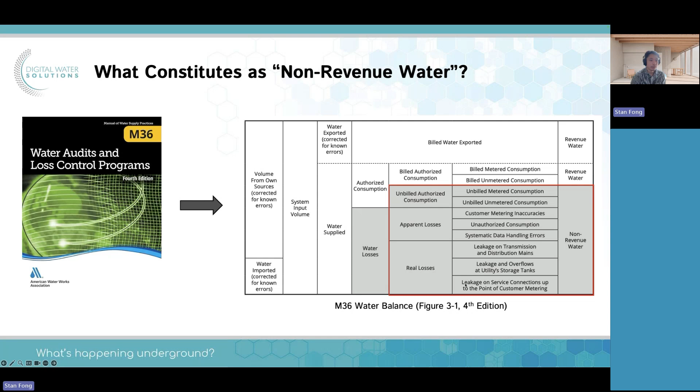So what is non-revenue water, right? Many of us are going to be familiar with AWWA and M36. This is kind of one of the standards that a lot of us look for when it comes to defining non-revenue water, water audits and water balances and whatnot. So this is the water balance according to M36, right? And we can see inside this water balance, when we talk about water loss, we really are looking at this portion here. So non-revenue water, according to M36, is made up of unbilled authorized consumption, apparent losses, and real losses, right?

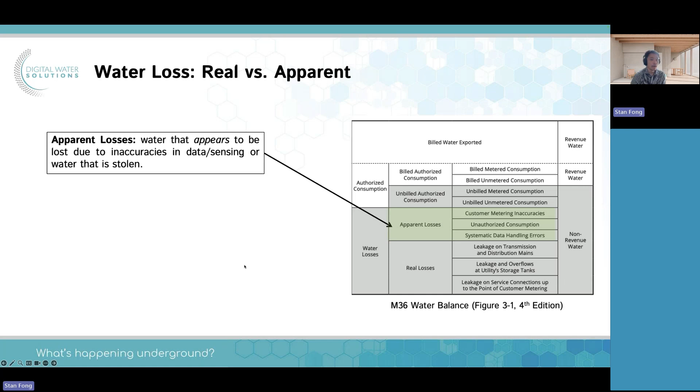So with that, the water loss is just the apparent loss and the real loss. And what's important to note here, when we talk about apparent losses, we're talking about water that more or less appears to be lost, right? Due to inaccuracies, your meters or your sensors have drifted over time, or water that has been taken out of the system without authorization. Real losses are leaks, right? Water that's lost to any kind of leakage, and there's different kinds of leaks. But the more important thing to note here is that in the US, real loss accounts for 87% of all water loss, right?

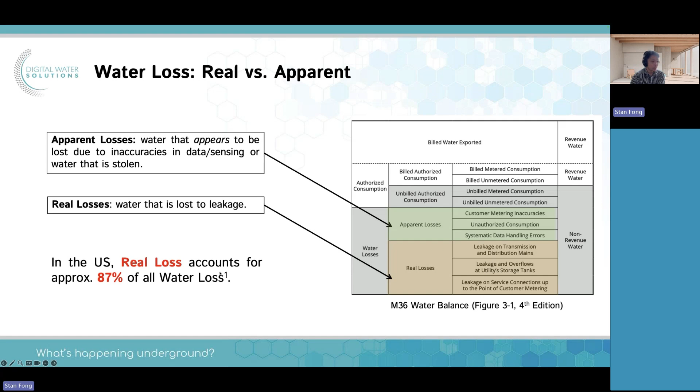So what types of real loss are there, right? So we talked about it's all leakage. And M36 goes on to define that real loss is one of 3 types. You've got reported leaks, which are breaks, right? They get called in. You get unreported leaks. So these are going to be the non-surfacing leaks that I think a lot of utilities are struggling with right now. They don't surface, so it's hard to detect them without a dedicated means like acoustic surveys, loggers, continuous monitoring. And then you have things like background leakage, which is basically defined as leaks that are too small to be detectable using these acoustic means and whatnot, right?

So the definitions of these, they're not absolute. And over time, as technology gets better, you're going to see more things that would have been classified as background leakage become unreported leaks because we're going to have technology that can detect these leaks earlier and earlier. And that's really the point of continuous monitoring, right?

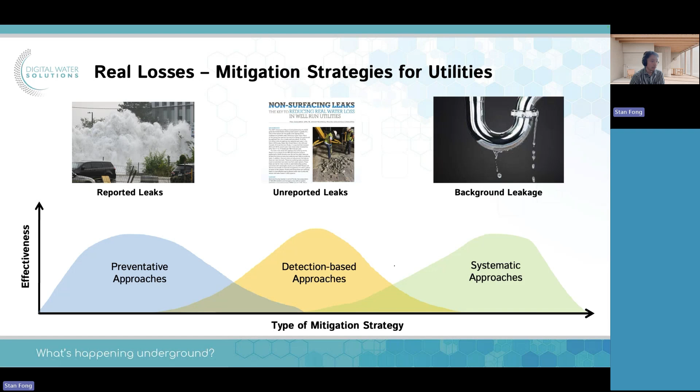There's really three separate schools of thought when it comes to how do I deal with these things, which means as a utility, most utilities deal with all three types. So you're going to need some strategy that incorporates elements of all three. And that's really where we'll talk about continuous monitoring.

But when it comes to any kind of leak, also from M36, we break the runtime of that leak into three stages. The awareness stage, the A. The L stage, location - how long does it take for you to pinpoint the leak? And then the R stage - how long does it actually take for you to repair the leak?

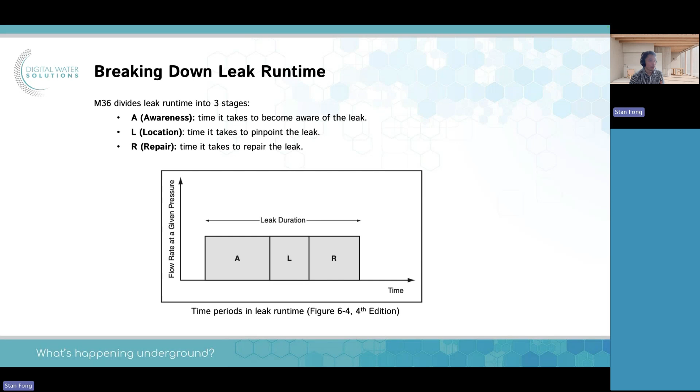So going back to the three types of leaks, just using an example for illustration - when you have a reported leak, the entire ALR stage is very, very short. You've got a leak that appears, someone calls it in, you know exactly where it is. You have to go and repair it because the flow rate is going to be very high, typically for those leaks. Unreported leaks, you're going to have a longer awareness stage. You're really not going to know about it until you go out and actually do that survey, or maybe it becomes a surfacing leak or a reported leak.

And then location can also be tricky at times, because these leaks are inherently subsurface and difficult to hear, depending on the system. And then background leakage - these leaks run for very, very prolonged periods of time. I'll show an example later where we think we see a background leak that turns into an unreported leak that turns into a reported leak. So sometimes these three types of leaks are interrelated - one becomes the next and so on.

But the idea is this awareness time is something we want to keep in mind. And when we think about how much water is lost to each type of leak, this is the flow rate on the y-axis, time on the x-axis. So the total amount of water lost is really just the area right under this curve.

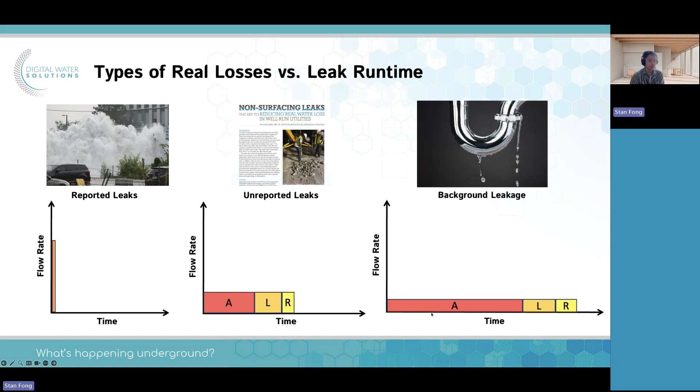So looking at the size of the shapes, you can see usually for these reported leaks, these breaks, although they have very high flow rates, comparing it to the runtime of unreported leaks and background leakage, you lose a lot more water on average to these two types of leaks, especially unreported leaks. So this is kind of the main takeaway here - a significant portion of water loss is going to occur during this awareness phase.

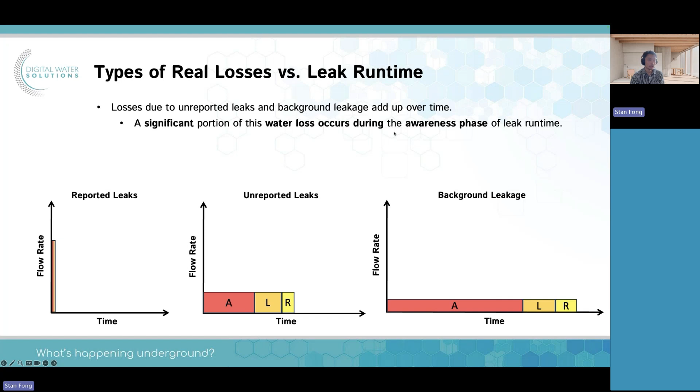And so this is where continuous monitoring comes in. The way that I look at continuous monitoring is it really is trying to mostly tackle this unreported leak problem - that's at least what we see in industry right now. A lot of these technologies are centered around leak detection, some are centered around pressure monitoring. But the idea is a continuous monitoring strategy is going to give you a little bit of leverage into all three of these categories. So taking our hydrant.AI solution, for example, what do we do?

So for acoustic leak detection, it's perennial for us. We have the acoustic sensors, the hydrophones, in the device. We're listening for leaks every day. You compare that to a leak survey where you only get a snapshot every time you send that surveyor out - it could be once a year, once every 4 years if you're rotating around your water system. So that's one of the benefits - having that perennial acoustic leak detection reduces that awareness stage. You know about that leak sooner, you can cut down on the water lost during that time.

We do, specifically with hydrant.AI, a lot with pressure anomaly detection. So we take that pressure data from the sensors. Each utility is different, each water system is different, and it learns the patterns and is able to identify when you have significant patterns or deviations from your normal pressure patterns. Hopefully that means you become aware of that before it becomes a larger problem down the road, or a break.

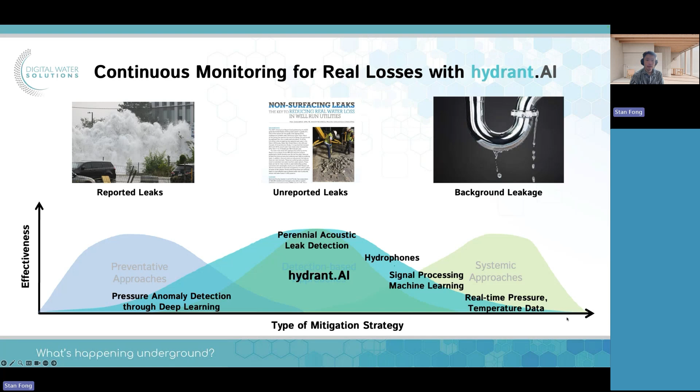Continuous monitoring, that's great on paper. How do we actually estimate the ROI of continuous monitoring? There's a couple big factors that come into play. One is geographic factors - where are you located, how expensive is water, how available is it, what's your method of water treatment? It's going to affect how much it costs to supply, as well as to the customer.

Another important factor is population density - how many metered connections do you have per mile of pipe? When you think about putting a continuous monitoring system, a permanent monitoring system in, it's got eyes on a certain length of pipe radiating outward from where you install that device. The more connections you have within that radius, the more bang for buck you get.

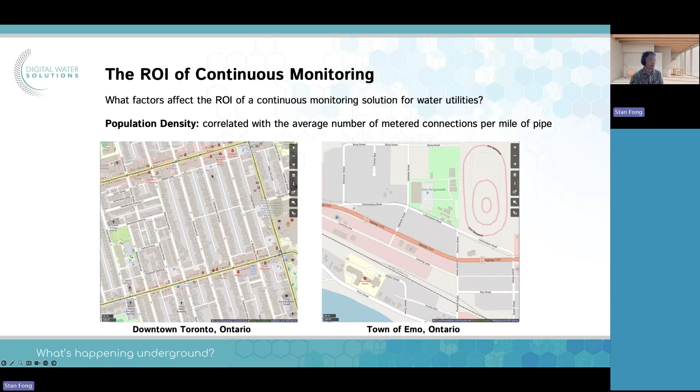This is showing an example of downtown Toronto. This is not the distribution network, but you can infer how many connections and how much pipe you have. These are on the same scale. This is another town in Ontario, Emo, and you can see the difference. If you're a water system out here, your approach to evaluating continuous monitoring, your strategy to deploying it, is going to be very different compared to someone like Toronto.

Another factor is pipe material and age. Average break rate is going to vary significantly depending on the type of pipe material. Older pipe is more likely to fail, but from a report by Utah Water Research Facility in 2023, you can see cast iron has 3 times the failure rate of AC, while PVC has a very low failure rate. The type of pipe material you have is going to significantly impact your potential ROI as well.

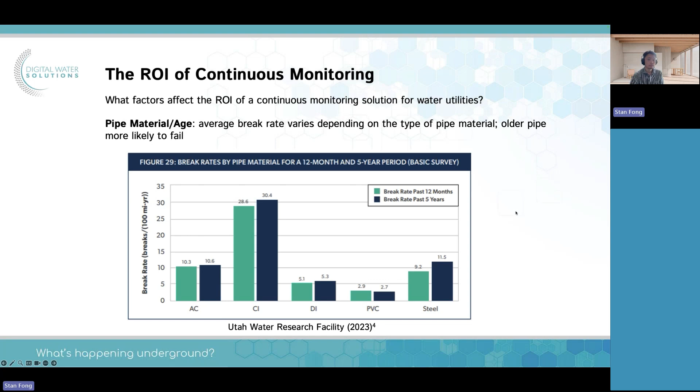So what does that really mean? It translates to a lot of complexity when it comes to figuring out what you're actually going to get back when you invest in a continuous monitoring system. With that in mind, internally at DWS, we wanted to develop an ROI calculator for utilities - maybe your utility is looking into continuous monitoring and you want to understand what you'll get back potentially from the system, or you're a utility that already has hydrant.AI and you want to be able to quantify the ROI of leaks that you find in the system.

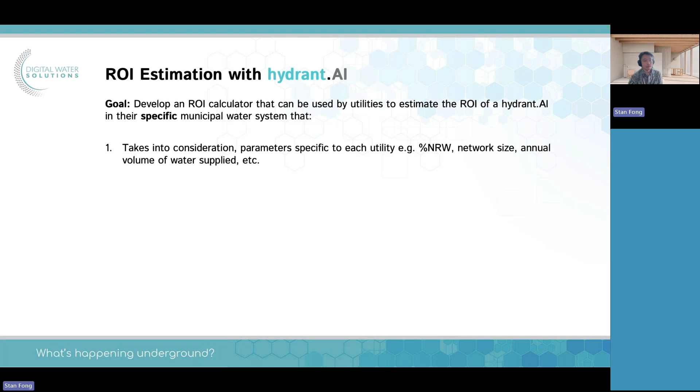Some of the goals we had - we want this calculator to take into account the parameters that are specific to each utility: what is your percent non-revenue water, the size of your network, total length of your water mains, annual volume of water supplied, those geographic factors, population density, pipe material. And this is important - wherever possible, use data from publicly available sources, things like average break rate, water costs. Anytime we can use publicly available data and cite that data in the calculator, it helps build confidence and transparency in the calculator.

To add on to that, since this is an ROI calculator for our specific continuous monitoring solution, there are going to be parameters in there that will not be publicly available. The important thing for us is to calibrate these parameters using real world performance - you'll see in the case studies whether the numbers we're generating from that calculator are in line with what we've actually seen from these deployments.

So this calculator is going to be available on our site for anybody to use, hopefully in the next month or two. But I won't make that promise on behalf of the developers. And there's also going to be a white paper that goes into all this information in more detail.

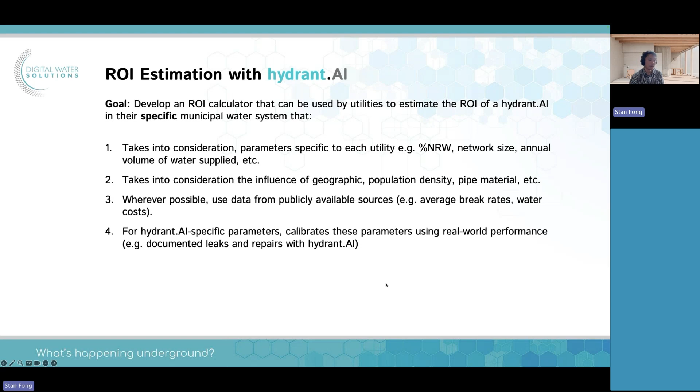Don't worry too much about taking in everything here. Just to show some examples, this is a plot that's generated showing cumulative water savings. This particular iteration looks at differences between geography. I've picked a fictitious utility, DWS Waterworks, with some average unit water cost to the consumer, and you can see how that compares to the national average across the US.

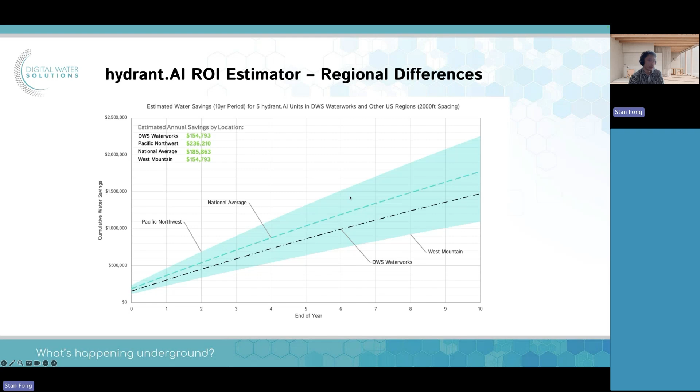If you're somewhere in the Pacific Northwest, you're in this upper bound of savings. And if you're in the West Mountain region, you're in this range. This is generated from a device spacing we have for our units—I'll get into that in a few slides. So this is just to show there's sometimes a large disparity depending on where you're located and the type of ROI you can get from continuous monitoring.

Another version of this calculator lets you look at population density. Similar to that last plot, if you're high population density, you're going to be on the upper end of this curve—you're going to have a higher expected return on your investment, as opposed to low population density, where you're going to see less, with everything else held constant.

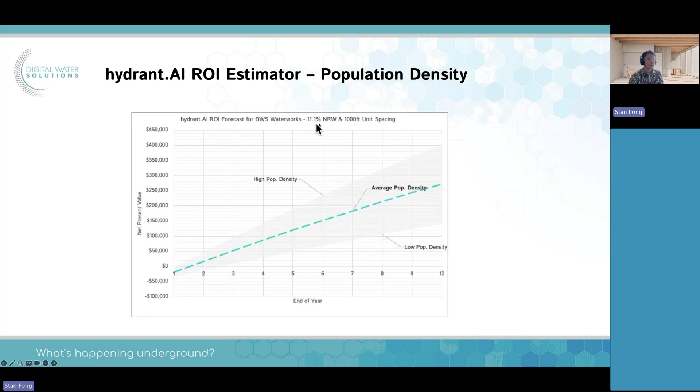For example, when you put the units farther apart, you're getting more visibility on pressure in a larger portion of your system. Spacing the units close together is good for leak detection, but you're going to lose out on pressure monitoring. So there are some benefits not incorporated into this calculation—this is just an example, and we'll have a paper that explains this in more detail.

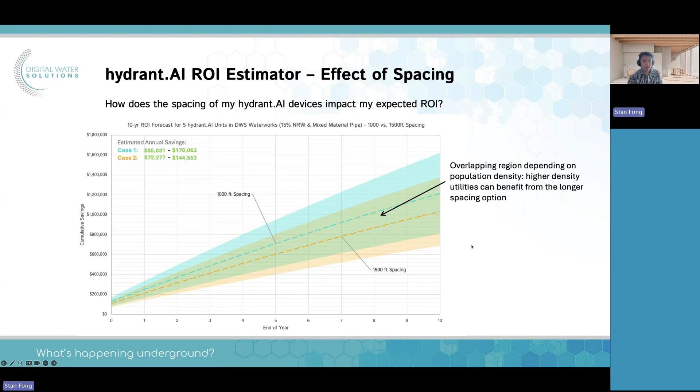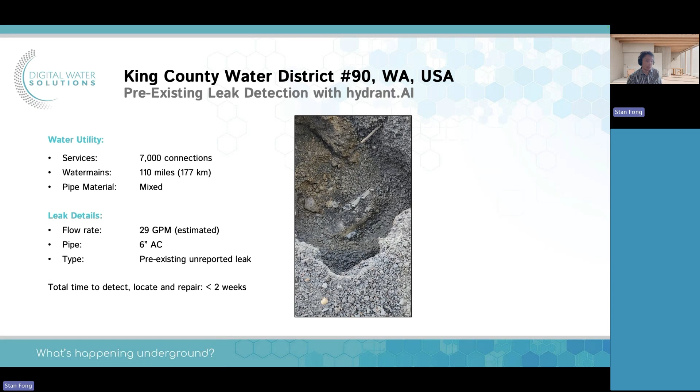I want to jump into some of the case studies. How do we actually show that continuous monitoring works in terms of ROI? One that we did recently was with King County. There's a pre-existing leak that's been in the system—we don't know for how long. We install our units and we're able to detect that leak right away. That's one of the things we can do with our hydrant.AI platform.

And then we can repair that leak—that's the leak there being repaired. This is for King County, WD-90 in Washington, US. They've got 7,000 service connections, 110 miles of water main, mixed material. This particular area where we deployed was AC, with a fairly large leak—29 gallons per minute, high pressures in this particular zone.

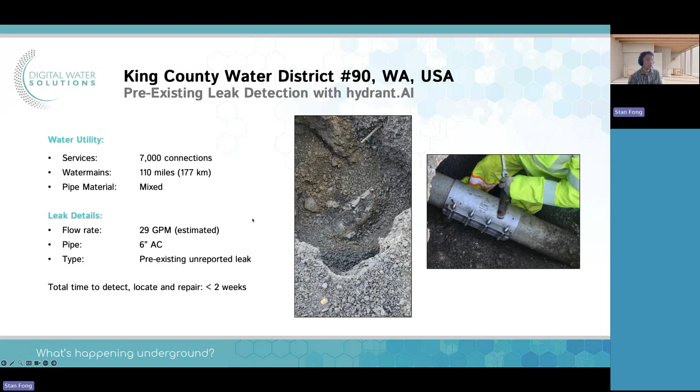And this is a pre-existing, unreported leak. The actual time to detect, locate, and repair, once the units were installed, is roughly less than 2 weeks. But if I look at that in terms of the implications for the next leak of this nature—because it's a pre-existing leak, we don't know how long it was running prior to the start of monitoring—it could have been going for months, or just a few days.

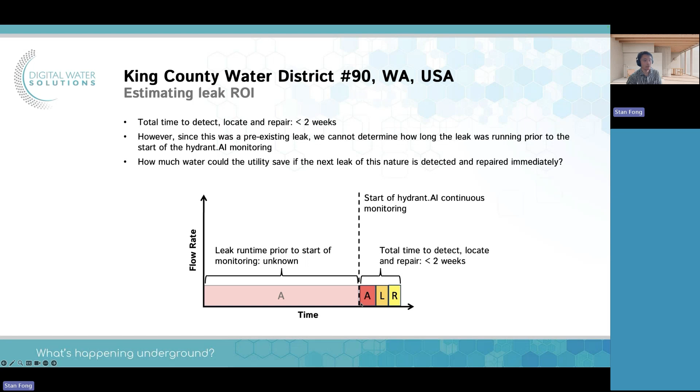But the idea is, with continuous monitoring in place, the next leak you see of this nature, you'll be able to follow this timeline—detecting, locating, and repairing it in 2 weeks, as opposed to having it run for months or years.

So we found in this case, that leak would have cost the utility $6,700 a month in lost water revenue. If you let that leak run for one year, that's $80,000. When you have continuous monitoring in place, that leak is only going to cost you $3,000. You're going to find and repair that very quickly.

So the idea here is to be able to demonstrate with any solution, any technology that you implement, that you can get your ROI back in some tangible way, in some reasonable period of time. With us, we're trying to show the value of continuous monitoring. Yes, it's a permanent long-term solution, but the ROI actually comes very quickly. You're going to get a lot of that value back in the first year.

And then you're going to continue to see value, because what we see in a lot of these areas with high water losses is you fix one leak, another one is going to happen. It's not that you fix all the leaks there and that's great, you can move the unit somewhere else. You're always going to get leakage. It's always going to be this continuous cycle, this battle with aging pipe and whatnot. So you're going to see that value return year over year, most likely.

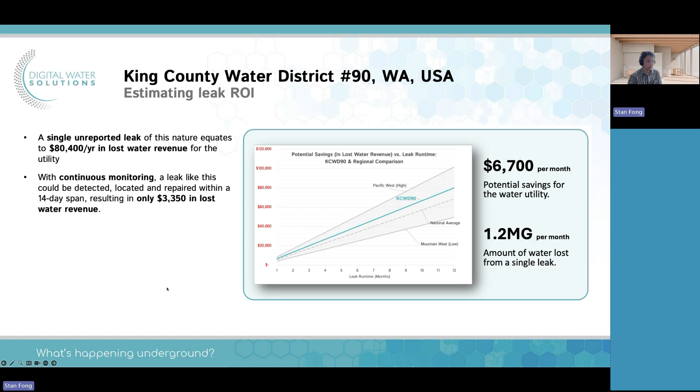So another example here is close to us, in the region of Waterloo, specifically the township of Ayr. Very, very small distribution network. You can see just 15 miles of services and 20 miles of water main. Mixed material, but mostly PVC. This is a very small leak that we found here, and this is a few years ago that this particular case study was put together.

This was really during the phase where we're trying to understand what we can do with hydrant.AI. How early can we detect a leak? How well can we track these leaks? And what does that translate to?

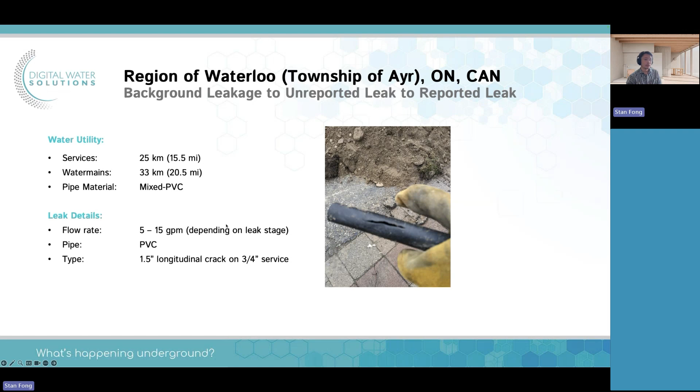So for this particular leak, we did an interesting study. This is the leak energy, one of the things we track with our machine learning models. You can kind of think of leak energy as correlated with leak size, not one to one, but you can think of it that way. And you can see this is a hydrant that was very close to this leak.

You can see in October there's a certain baseline, and then it starts to slowly creep, that leak energy. We can think of that as background leakage. You can see how long it stays as a background leak, and then boom, something happens in the system, it turns that background leak into an unreported leak. The flow rate is going to go up. And then finally, in the span of a few days, it's going to go from that unreported leak to a reported leak. It ended up being a break here.

So the idea here is that even a small leak like this, water is much cheaper here, it's still $43,000 a year in lost revenue. But the other takeaway here is that this shows background leaks, and how they can turn into unreported leaks, and how they can turn into reported leaks.

So the benefits of being able to detect these leaks early is not just the water savings, but you're also saving time and resources. You're saving the emergency repair costs. And you're going to prevent a lot more wear and tear on your system, preventing some of these leaks from developing to the next stage.

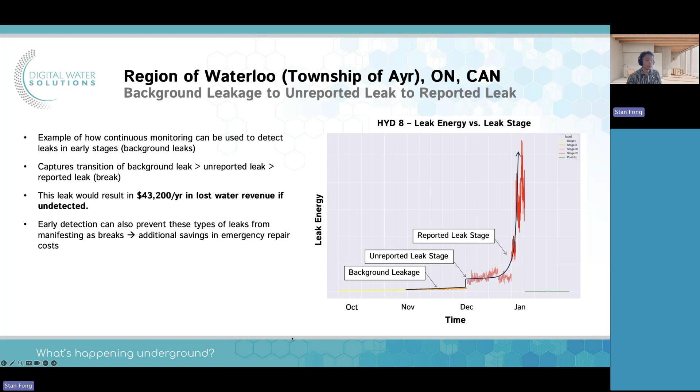So that's pretty much the crash course that we have here on ROI. As I said, the ROI calculator is going to be up on our site shortly so that you can play around with that, punch in the specific information to your utility, and get an estimate that is unique to your circumstances.